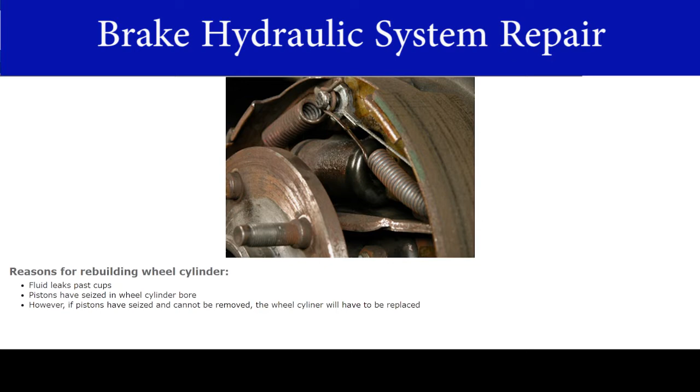We'll begin by disassembling the wheel cylinder. Start by removing the bleeder screw. If you use heat to help remove the bleeder screws, disassemble the wheel cylinder first. Remove the boots, the pistons, and the cups from the wheel cylinder body. Then slide the spring out of the body. Throw away any rubber parts.

Clean all of the parts with denatured alcohol. Inspect all parts for damage. Any component that has damage that will affect its performance will need to be replaced. Minor scratches, corrosion, or oxidation in the bore can be honed. However, the cylinder can only be honed to within 0.003 inches, 0.08 millimeters, of the original diameter.

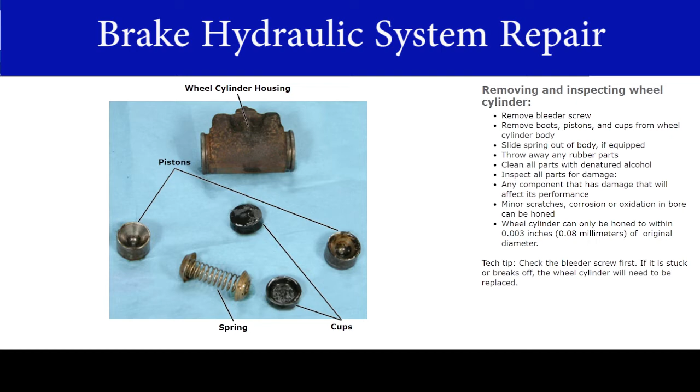Only a wheel cylinder with a steel or cast iron bore can be honed. Aluminum wheel cylinders with a rolled finish cannot be honed if they do not have a steel liner. They must be replaced. Select each tab for more information. When finished, select Next to continue.

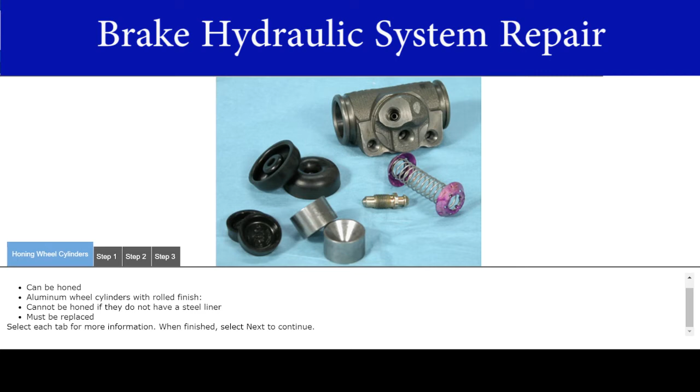Put the wheel cylinder in a vise using its mounting flange. Then attach the appropriate hone to the drill. Lubricate both the bore and the hone with clean brake fluid.

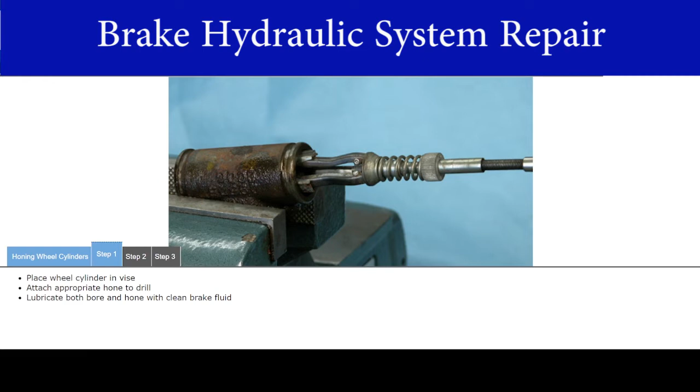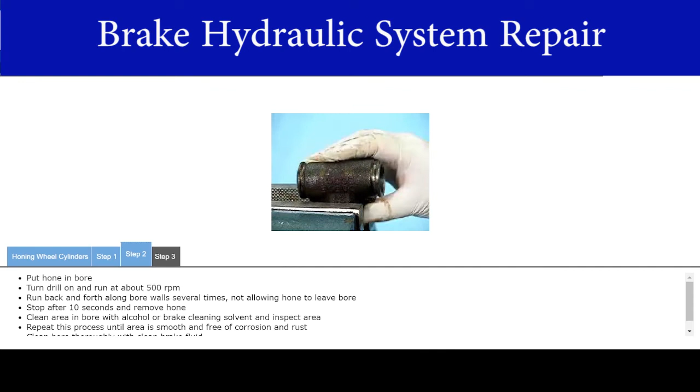Put the hone in the bore. Turn the drill on and run it at about 500 RPM. Run it back and forth along the bore walls several times, not allowing the hone to leave the bore. Stop after 10 seconds and remove the hone. Clean the area in the bore with alcohol or brake cleaning solvent and inspect the area. Repeat this process until the area is smooth and free of corrosion and rust.

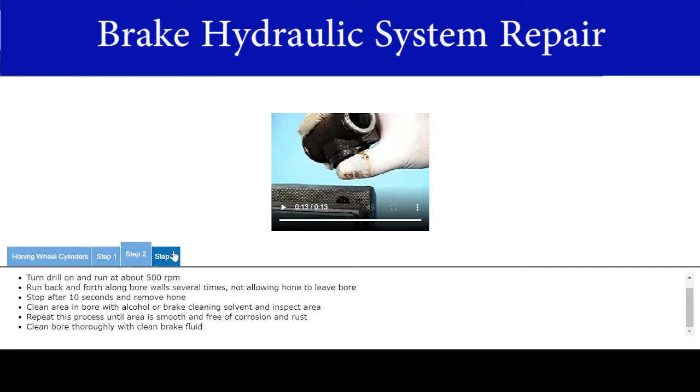Clean the bore thoroughly with clean brake fluid. Finally, insert a 0.003 inch, 0.08 millimeter feeler gauge into the bore. Attempt to slide the piston in the internal diameter of the wheel cylinder. If the piston slides in easily, there is too much clearance. You can double-check this by measuring with a micrometer. If there is too much clearance, replace the wheel cylinder.

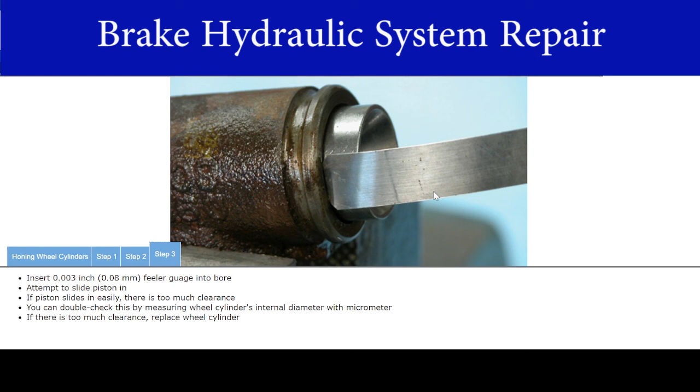You are ready to reassemble and install the wheel cylinder. This procedure is the reverse of the disassembly procedure. We will now do an exercise to reassemble and install the wheel cylinder.